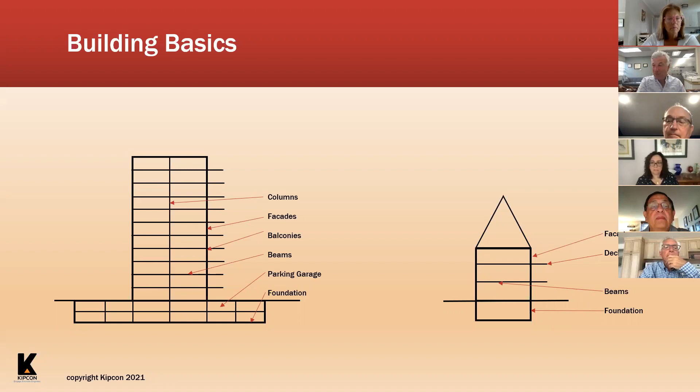And for the gentleman who was looking at my Kipcon minutes, I did talk about decks last month because last month was deck month. So now there are a few different materials that buildings are made out of.

Steel - in regards to its strength, it has the same strength in all directions. If you pull it, push it, whatever you do to it, it has the same strength in every direction.

Just to give you an idea where the name KIP comes from, Kipcon is the name of the company. It has a capacity of, say, 60 KSI, 60 kips per square inch. So that's where Kipcon came from, KIP Consulting, and that's the engineering origin of the name.

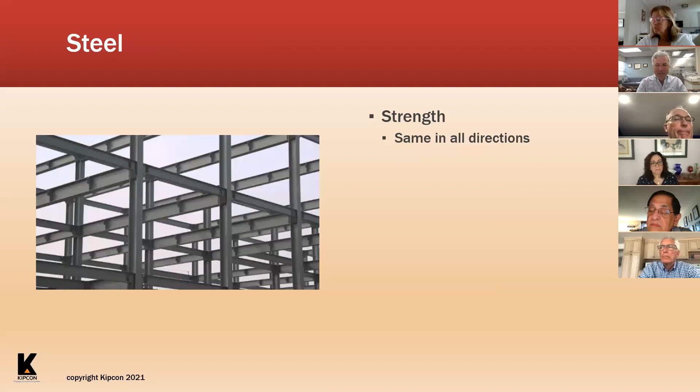But steel and concrete are a little different. Concrete has very good strength in compression, when you push it together, but very little strength when you pull it in tension. So concrete, as you've heard in the news, is made up of concrete and reinforcing steel, or rebar, different names. The reinforcing steel is very strong in tension, so that's why it's put into the concrete, although the concrete itself is very strong in compression.

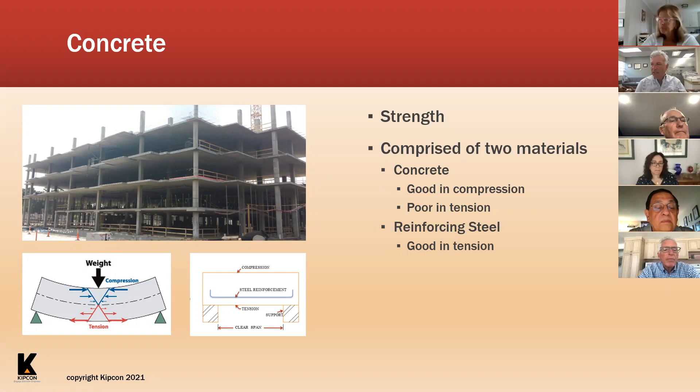So that's concrete. Then we have wood. Wood strength varies, it's the weakest of the materials, no question about it. Wood is a very interesting material, I've worked a lot on wood design. Wood has a few different strengths.

If you're pushing parallel to the grain, it's very strong, but if you push perpendicular to the grain, it's much weaker. So when you're designing in wood, you have to take into account two different strengths, parallel to the grain and perpendicular to the grain. The other thing that's very interesting about wood is if it gets wet, you have a significant loss of strength, generally about a third of the capacity is lost if it's wet.

So think of a wood deck in the rain that's absorbing water, the strength goes down significantly. When you design with wood, you have to take into account an adjustment factor for moisture. Temperature also affects the strength, so moisture and temperature significantly affect the strength of wood, in addition to perpendicular versus parallel to the grain. It's very interesting, you can tell I'm a structural engineer and could talk about this all day.

Let me interrupt with a question, if I may. Sure, please. It may not be particularly germane to this, but I've often wondered, as I drive by and see buildings or homes under construction in the weather, there's a lot of wood open to the weather for many days while the building is under construction. And I see no effort to cover or protect the exposed wood from rain, snow, etc. during that process.

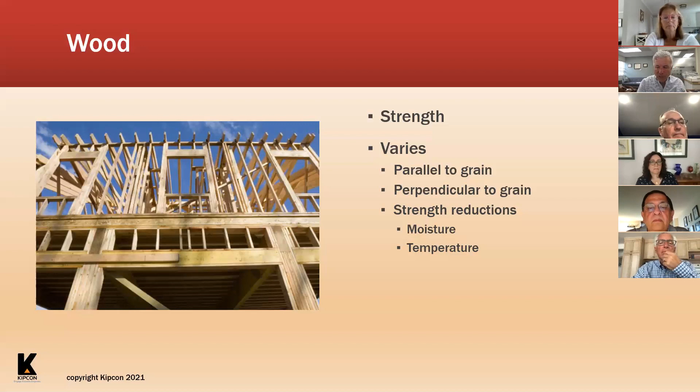Now the other thing, not a specific material but a facade of buildings. I'm only touching on a brick facade, but there are many different types of facade. The facade is the outside walls of a building. An example of a brick building is made up of a system for waterproofing, which includes flashing, weep holes, end dams, and brick ties, though I won't go into exactly what they are.

The system is based on water always getting behind the outside surface. How do you get the water out when it gets behind it? That involves the flashing and the weep holes. We're working on one community right now where I looked at brick that's about 30 years old, and there are no weep holes.

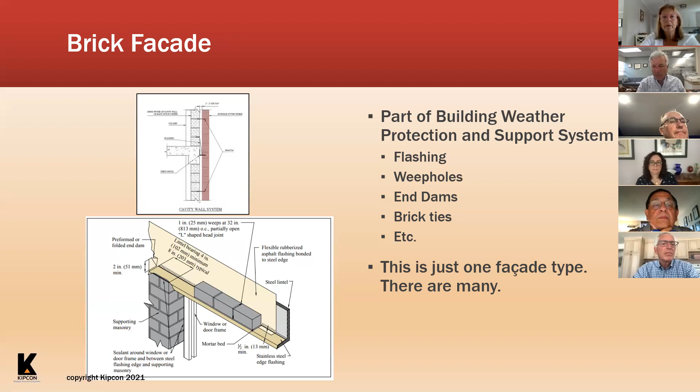And then they're wondering why the lintels are rusting away and have to be replaced, but that was the original construction. So facades are also a very important part of the building. What's the primary cause of deterioration? There are a few causes, but in my mind the number one cause is water. Water causes deterioration, whether it's steel, and I'll show you some examples.

These are from actual buildings we're working on. What happens to steel when it gets wet? It rusts. Now, the pictures I'm showing are not a condominium or community association. This is a parking garage under an office building. If you look to the left, you can see the steel beam where the bottom of the beam, called the flange, has totally rusted through. It is gone, and that's from water. On the right, you can see beams and columns that are rusted to the point where they lose their strength. This is what happens to steel when it gets wet.

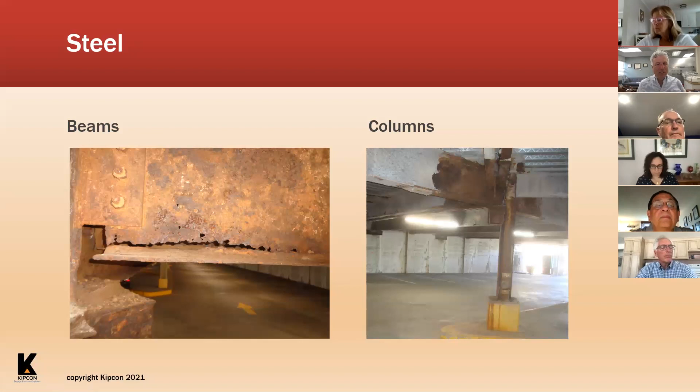One of the things I'm going to talk about later is what you can do, without being an engineer, to identify things. Just walk through your parking garage. Rust, you can see it. You don't need to be an engineer to see it, you need an engineer to figure out how to fix it. But this is what happens to steel when it gets wet.

What happens to concrete? I told you concrete is a combination of steel and concrete. One of the primary problems with concrete is that it absorbs moisture. That moisture touches the reinforcing steel and it rusts. What happens when something rusts? It expands and will crack out or spall. There are a few technical terms, but it cracks out the concrete. When the concrete is gone and the steel rusts, it loses its strength.

Excuse me? Yes, Mary? I don't see any pictures. You're speaking as if we can see pictures. Can you guys see the presentation? Yes. No. I don't know what's wrong. Oh Mary, you should be able to see it. I'm sorry, what did I do wrong? Okay, sorry. I hope everybody else can see it. I was thinking to myself, I hope I'm explaining it well enough if you can't see it. No, you're doing great.

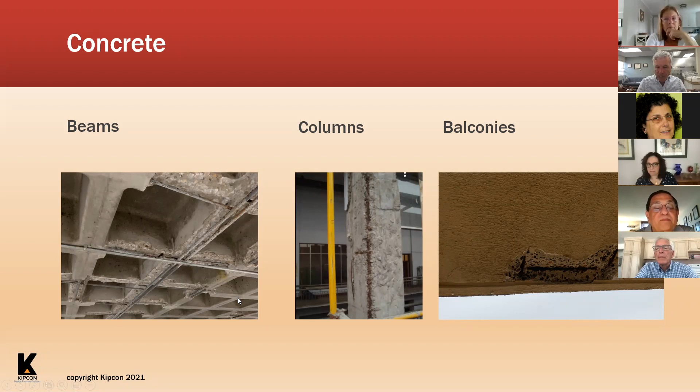The complex I'm in is California stucco on the outside, but it's put up in panels. Would that be the same type of application? Well, the panels are attached to the building in a similar way, but it's probably flashed and supported differently. But water will get behind it. The question is, how do you get it out?

There was a material years ago called EIFS, exterior insulation finish system, that was a barrier system. Barrier system meant water wasn't supposed to get through it, it just ran down off of it. This created a huge problem because water was getting behind it, it didn't get out, and it destroyed a number of buildings. So now EIFS is a drainable system where the water can drain out. But all of these things are conceptually the same, even though they're different materials.

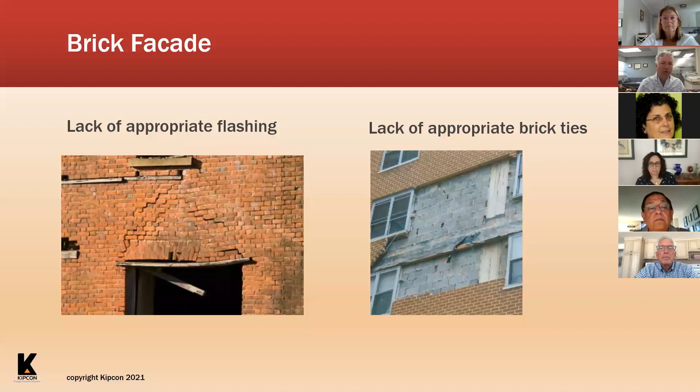Now, the other thing we talked about is danger, but these are just from water. What happens when somebody's building something next to your building? Let's say they're driving piles and there are vibrations that affect your building, or they're digging a foundation next to yours that could affect the foundation holding up your building. So there are things other than water that can affect your building's strength that aren't from Mother Nature, and you need to pay attention to these too.

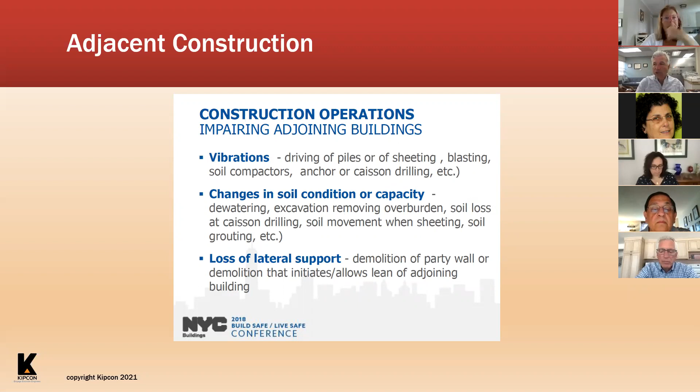You'll see in a number of the parts of this presentation I refer to material like this from the 2018 New York City Build Safe, Live Safe Conference. There's a lot of information out there for reference, which I'll touch on at the end. There's also adjacent construction to consider.

I added this yesterday because this isn't just for community associations. Yesterday I got a call from a car wash close to my office saying they had a structural problem and asking me to take a look. So I went and looked, and let me tell you what I found. It's a car wash where the water system is pumping away all day.

It rusted away. I told the guy yesterday afternoon, you can't use this car wash anymore, the roof is about to collapse. He said an engineer had been out two years ago and told him it was all right. I asked if they'd done anything in those two years. He said no, we just put up the tarps in the ceiling.

It's the owner's responsibility. So I went back to my office, sent an email saying it's a structural problem and the building has to be shut down immediately. I also called the local building department, because I told the guy, if something happens tomorrow and I was here and didn't do anything, I'm part of the lawsuit.

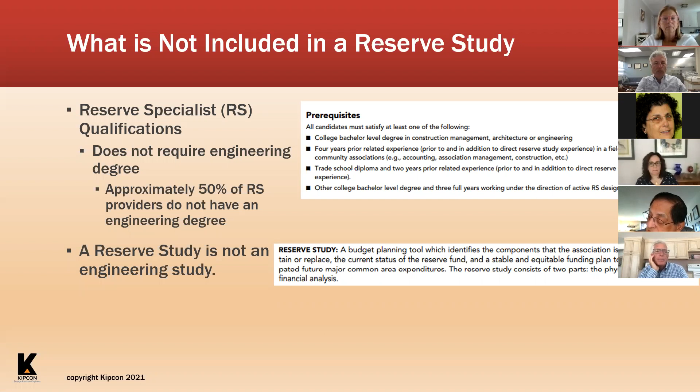And there's a 30-year concept that is critical for you with reserve studies. Reserve studies typically include cyclical replacements that will take place within 30 years after you do the study. So if you're getting an update of your study done, you have to make sure that the company that's doing it, if the community is now 10 years old, you're going out for 40-year components. Things will have to be added to your study.

We recommend that when people do updates, if the community is more than even 5 years old, you have to look at the entire community to see if things should be added. So this 30-year concept is very important.

And then maintenance, which I'm going to talk about, which is part of the plan, and it's not included in a reserve study. Some people look at a reserve study and say, why doesn't it include maintenance? It's not a cyclical replacement, it's not a capital replacement, but there are certain things on there that fall into what I call a gray area that some people consider maintenance.

For example, if you include pavement seal coating in a reserve study, which we generally do, somebody might consider that to be maybe maintenance. If you include parking garage deck sealant or balcony sealant, some people consider that maintenance. But my point is, there's no, I hate to say, there's really no strict guideline as to what should be included in the reserve study versus a maintenance schedule.

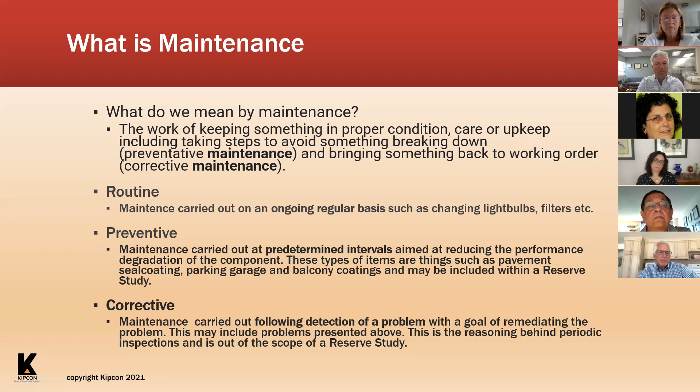All right, periodic inspections, the other leg of the stool. A periodic inspection is an inspection aimed at identifying issues when they become evident, so that you can do corrective maintenance. Keep in mind, deterioration of a building is a progressive thing—it doesn't happen all at once. It can occur over time.

I've got to change that wording—deterioration of a building does occur over time, and wear and tear, due to deterioration and poor maintenance, is a progressive condition which worsens over time. I've never seen it get better, and I've never seen it stop getting worse.

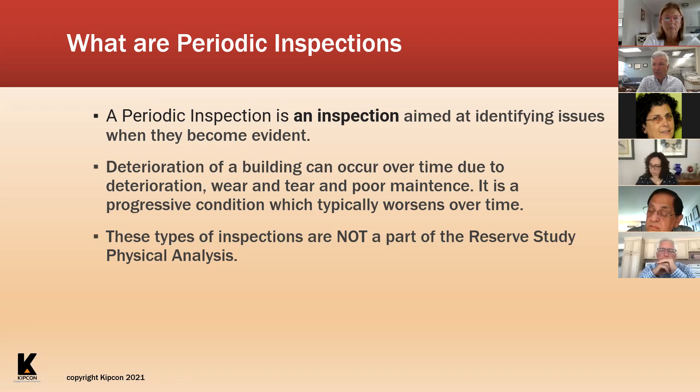The type of periodic inspections you're hearing more and more about are not part of the reserve study physical analysis. A periodic inspection needs to be done by somebody who understands structure—that's why I mentioned the qualifications needed to do a reserve study, because those people are in many instances not trained to do periodic inspections. There are many recommendations regarding the frequency of periodic inspections. This is something being worked on—Ed mentioned that's what the New Jersey Task Force and the national task force are doing.

I'm going to show you some examples. This is not reinventing the wheel. I'm going to show you what I mean by that.

Periodic inspection timing is based on many different things: the age of the building, the use of the building. For example, if you have a parking garage in a building, you should inspect it more frequently than one without, because it's subjected to the elements, and in the winter in our part of the country, to people driving in it and bringing in the salt from the roads.

So certain types of buildings and portions of buildings need periodic inspections more frequently. Periodic inspections are also based on the condition of the building and the geographic location. No question that although these problems are common to all buildings, if you have a building on the ocean, subjected to salt water 24/7, 365 days a year, there's absolutely a chance it's going to deteriorate more quickly. So that timing is based on geography.

One of the things I'm going to talk about: if an assessment is not made, which most buildings don't have yet in most instances, the first assessment is generally called a baseline assessment. I'll talk about it in a second, but you need a baseline assessment as a starting point to determine what type of periodic inspection frequency you should have.

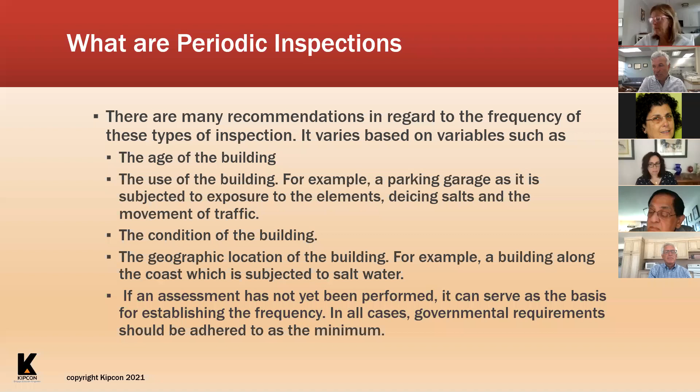Periodic inspections typically come in two categories. First, a preliminary assessment, where you go out and visually observe it. Can you see rust? Can you see water? Can you see different things and identify it? The preliminary assessment includes a review of the original structural drawings, looking at any previous reports, any issues going on, and things like that. It's to evaluate, in a kind of cursory nature, the potential for problems.

Potential for a problem can include seeing a ceiling that is damaged by water. What you do, which I'll touch on later because it's important, is you stop the water and check to see if any damage was caused by that water.

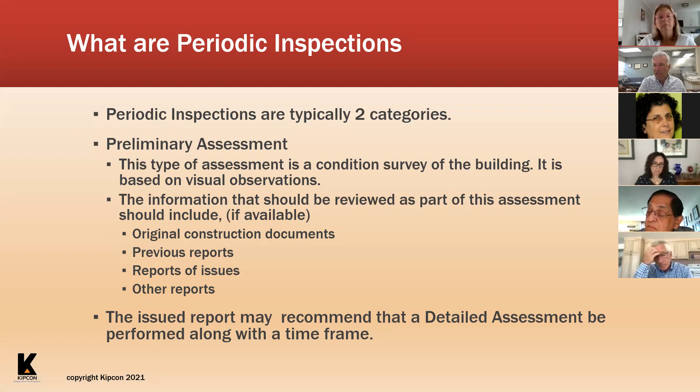The first stage is generally a periodic inspection as a preliminary. This then issues a report and may recommend a detailed assessment, which gets involved with material testing, invasive evaluation, structural design, and preparation of specifications for repair. Once you do a preliminary evaluation, it could, in most cases, narrow you down to certain parts of the building to do a detailed assessment. It may not be the entire building.

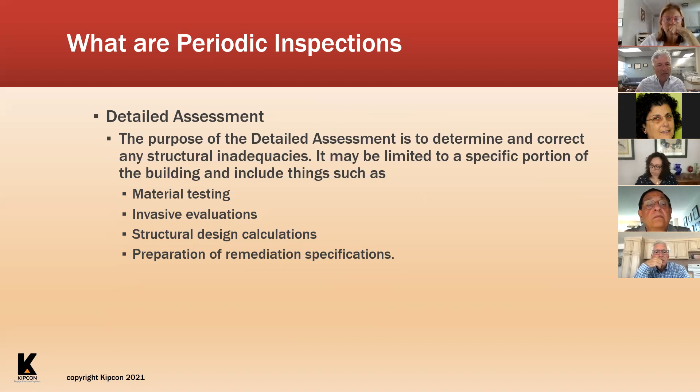For example, if you go out and everything looks great except the concrete balconies are starting to show signs of rust and spalling, the detailed assessment may then be targeted on that certain part. But generally there are two types of inspections.

So what about the frequency? Should it be 5 years, 10 years, 40 years? It's based on building type and building age. Keep in mind, you may also need to do a building inspection based on an emergency. Let's say somebody's building something next door and they're vibrating your building and you start seeing cracking - that may be an emergency. Or let's say a car crashes into a column. So what is the frequency?

I want to point out a few things going on right now. Jersey City is mulling stricter building inspections after the Surfside collapse. They're saying concrete residential and commercial buildings that rise 6 stories or more would need visual structural inspections every 10 years. I took this out of yesterday's newspaper, or maybe a few days ago. But these are the kind of things gurgling around. Although I'd argue that just putting a 10-year time frame on that should have a starting point - once you inspect it and see the conditions, if everything's okay, 10 years; if you see bad stuff, maybe every 2 years. But these are the kind of things happening.

That's in Jersey City. Here, this is for New York: 3 New York senators are pushing for stiffer building inspection requirements following the deadly collapse in Florida. They didn't say in this article what they're recommending, but this is going on. Now in Florida, clearly, Palm Beach County plans to ratchet up inspections for older high-rises and these kind of things. So you're reading about this in the paper every day - it's happening as articles are being written about this stuff as we're sitting here.

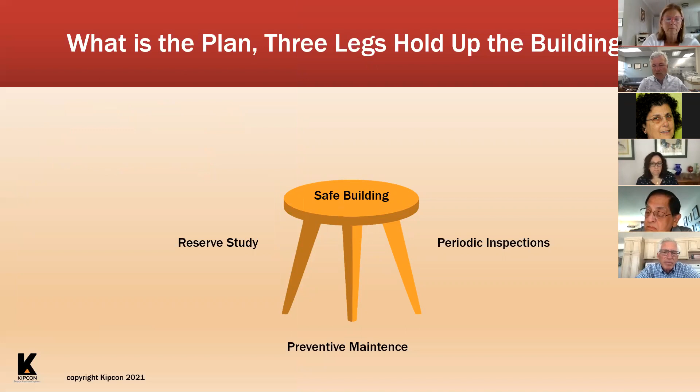So what is the plan? The plan is that there are three legs holding up the building: the reserve study, preventive maintenance, and periodic inspections, which in my mind will give you a safe building. So what does that mean?

Establish your baseline. The baseline is an inspection report to look at today's condition and do a report. That baseline report, essentially the preliminary report I talked about earlier, will give you a basis to decide: do I need to do anything immediately? Can I prioritize things? Establish the baseline for your building.

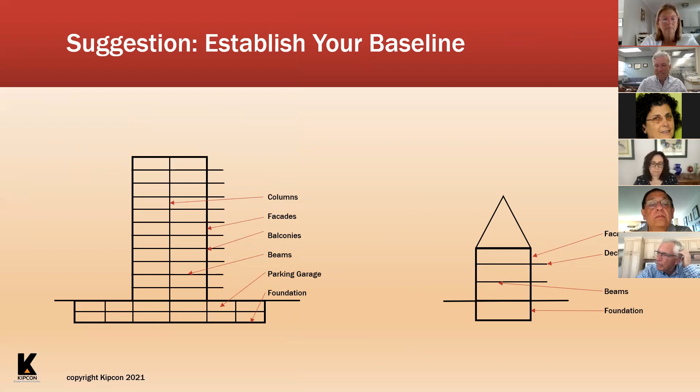The baseline evaluation is a good starting point for community associations. Use your reserve study as a starting point, but that is not the answer—it's just a starting point. Evaluate all the common elements, including those not in the reserve study. For example, the columns, ceiling, and beams in the parking garage are not in the reserve study, but you should be looking at them as part of this baseline study.

I'm just suggesting a reserve study is a good starting point, but think about it—just because you may want to consider updating your reserve study when this is done, the qualifications of the person doing the reserve update are not necessarily, in many cases, the same as the qualifications of the person who can do this kind of evaluation. So do not connect them. It's just a thought, but do not connect them—it's a different type of qualification.

Establish a maintenance plan for both preventive and corrective maintenance. The corrective maintenance will come out of this study—what do you need to correct right away? I promise you, if you start corrective maintenance on things that are starting to break down, it's a lot cheaper to do it now than to do it later.

A very common problem I see in parking garages is the expansion joint between two sections, with structural steel underneath. The expansion joint breaks and water gets through. Replace the expansion joint as soon as water goes through and it'll cost a few thousand dollars. But I can show you pictures of structural steel underneath that will cost hundreds of thousands of dollars to fix because they did not fix the expansion joint. So when you see something, stop the water.

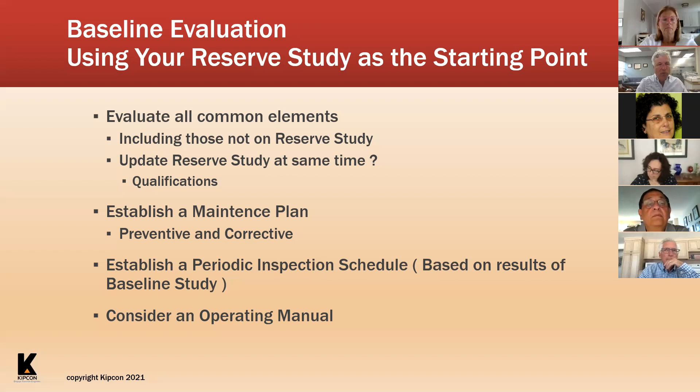So some builders, and not even just builders, communities should consider putting together an operating manual for their community. I think you'll start seeing this happen, because the operating manual may say periodic inspection every two years. It's not going to tell you exactly what to do, but it will put you on a schedule so you know what to do as it happens.

So, an operating manual. Again, pay special attention to any type of exposed structure, whether it's concrete, steel, wood, or whatever—you can see the problems. You don't need to be an engineer. If you see water, rust, or staining, it's a problem. You need to take the next step.

The places to look are exposed structure and facade. We just finished a reserve study yesterday on a brick building, and my guy out there doing the study saw locations where efflorescence was occurring. Efflorescence on a brick facade means you're seeing a white, salty-like material on the facade. That means water is going from the inside to the outside, carrying the salts in the cement to the outside, putting a salty fixture on the facade, whether it's brick or concrete.

What does that mean? It means that water is traveling from the inside to the outside. I'm going to show you a picture in a couple of seconds, but when you see the salts, that means the water is moving.

Next thing you're going to see is rust stains. So there are things you can look at that identify problems. Parking garages, big problems, got to look at them. A lot of times, and I'm not referring to Florida, just in general, the parking garages are underneath the buildings. They're holding up the buildings. I'm not saying that to scare you, that's just how a lot of these places are.

Concrete balconies, I mentioned that. Wood decks, wood decks are a huge problem. It's not just high rises. Any signs of moisture, if you're a manager or a board member or whoever, and you see any sign of moisture, stop it and figure out if it caused any damage. And for all the identified concerns, you can prioritize them based on this type of study, but the most important word is to act. You have to do something, because it's not going to get better.

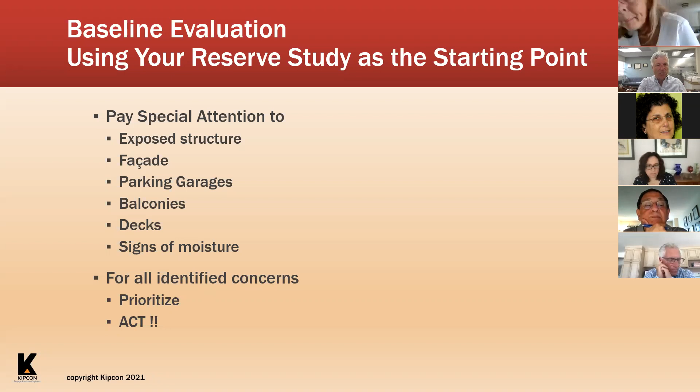If you see the efflorescence, do something. If you see the rust stains, you have to do something, because as soon as you see the rust stains, that means the reinforcing steel inside the concrete is rusting, expanding, and the next thing is the concrete's going to pop off and the strength is going away.

So for concrete, look for cracking, look for efflorescence, look for rust. For steel, look for rust, pretty straightforward. The other thing about steel is, if you go to a parking garage, a lot of times the steel is covered with fireproofing insulation, a white stuff that covers the steel, but it doesn't hide the rust. You can see that insulation, the brown stuff on it. So that needs action. I could show you millions of pictures, because this happens every day of the week.

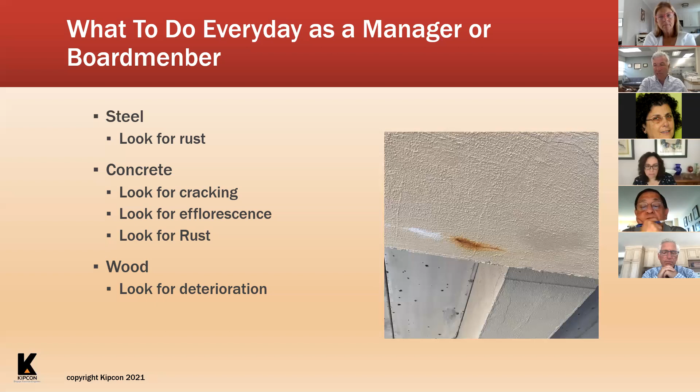Wood, look for rotted wood, you can see rotted wood. I look at these decks, and some of the things I see recently all the time is crazy. If you see signs of water, stop it, fix it if there's any damage.

The reason I show you this picture on the right is because this is a parking garage we're working on right now, where you can see encased in the concrete is structural steel. It's a column, but we saw rusting stains on the concrete. So if you see signs of water, stop it, find out if there is damage. We said we need to take this off to see what's going on. Where's this rust coming from?

So we took it off, and we found that the base plate and the steel column is rusting. We had to remove the concrete going up and down into where the rust stopped, and we found that the rust was significant enough in this area that we have to structurally reinforce this column. The only reason we found it was because we saw the rust stains, and we said we have to take it apart to not only stop the water, but to fix what's underneath it.

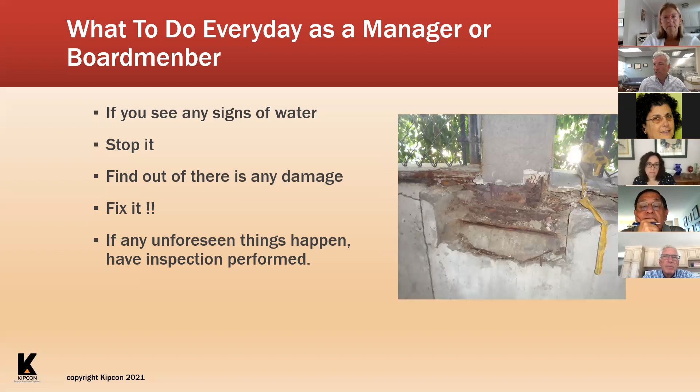So in this case, we're actually in the process of welding steel plates onto this column to give it additional strength, and we found it because of the rust signs. You can see it, it's totally encased in concrete up and down the column and at the bottom, but we saw the rust.

So what not to do as a manager or a board member. This is not uncommon. This is a parking garage that we just finished the specification for repair of.

And we walked into the parking garage, and what do you see? You see a blue tarp on the ceiling. Now, Ed, I saw you smile because you've seen this before. Why do they put that in there? They put it in there because water is dripping through, and they don't want the water to drip on the cars. So they put in a tarp.

I've seen gutters and downspouts put into parking garages to do this, where they put in this tarp to direct the water away so that it doesn't drip on the cars. But what does it do? They don't even look to see the structural damage, and now you can't see the structural damage continuing to get worse and worse.

So when we did the specification for this, we said the first thing you have to do is pull down all the tarps. Now you can see the rust that's going on, but this is just the edge. This is a no-no. Never, ever say put in something to get the water away from our cars or dripping on people, because things are getting worse behind it.

But what not to do as a manager or board member, not only know what not to do, but this gives you an idea. You walk through a parking garage, most of these things as lay people, not as engineers, you can see the problems. You may need an engineer to come up with the extent of it and how to fix it, but a lot of these things you can see on your own.

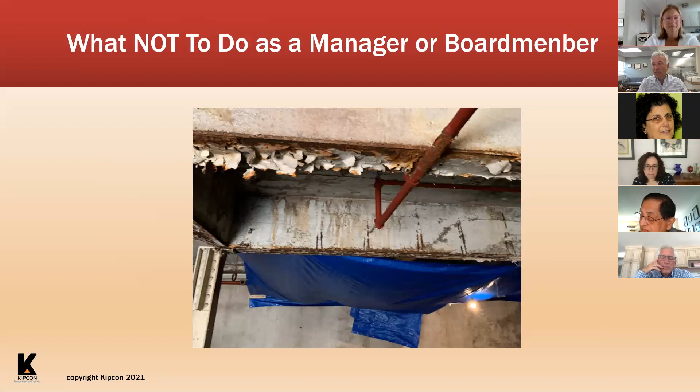In this case, the beginning balance was $2.5 million. And to go from full funding to baseline funding, they were able to take out, if they wanted to, $1,950,000 in an emergency, absolute emergency. Again, I don't recommend this. You shouldn't get to this point. But sometimes if you need to fix something, a building's going to fall and you need money instantly, you may want to consider this. So in this case they are able to take out $1,950,000 and still not go below zero. So that's a source of money, but keep in mind, you have to pay it back.

If you take money out of your fund, if you go to baseline funding, take my word for it, it's underfunding. You're very, very risky. But sometimes in an absolute emergency, I only mention this, even though I don't agree with it, just so you're aware that there is money available in an absolute emergency.

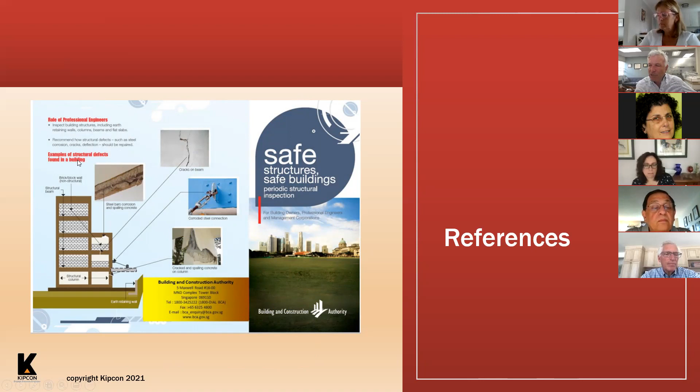This is from Singapore, it's awesome. Singapore has something called safe structures and safe buildings, with periodic structural inspections. If you look at this, it covers the role of the professional engineer and examples of structural defects found in buildings. It's awesome, this is what they do in Singapore.